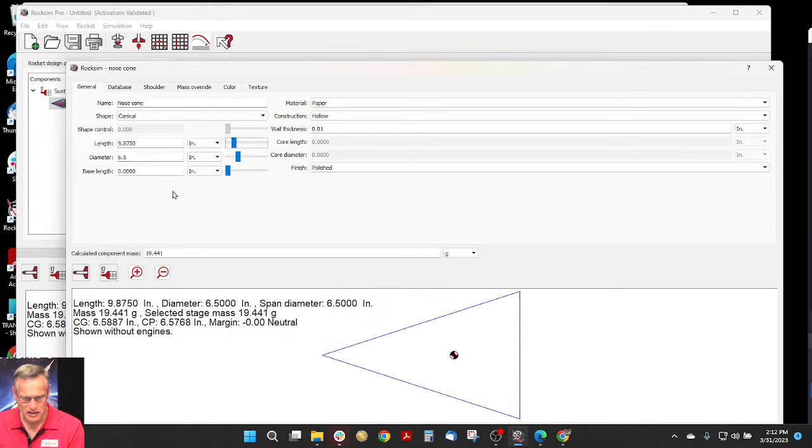The length, okay, so now we're drawing our cone rocket right here. So there's our cone. And we'll click, where's my OK button? There it is down here. All right, so we have our nose cone. Now we have to put in a body tube. So we're going to click inside tube. And this time I'm going to select from the database. I'll select an 18 millimeter by 2.75 inch long tube. On this screen you can't see it, let me make it a little bit bigger.

Okay, so there's our body tube, but let's move it back to here. Well, let's recess it a little bit. One of the things with rockets is we got to make sure that the center of gravity is in front of the center of pressure. And right now we're behind, so it says unstable. We'll call this the engine mount tube. And we'll click OK. Oops, I forgot to do one thing. On that screen, there's a little box right over here that says this is a motor mount. You got to check that. And it's going to be 18 millimeters. Click OK.

Actually, I want to do one more thing. I want to load an engine at the same time so that we can get a gauge of how much nose weight we're going to need to add. Estes C6-3, engine overhang of 0.5 inches, so it's going to hang out the back just a little bit. So there's our rocket engine, the brown part. Our center of gravity is back here, so we need to add some nose weight to move that center of gravity forward.

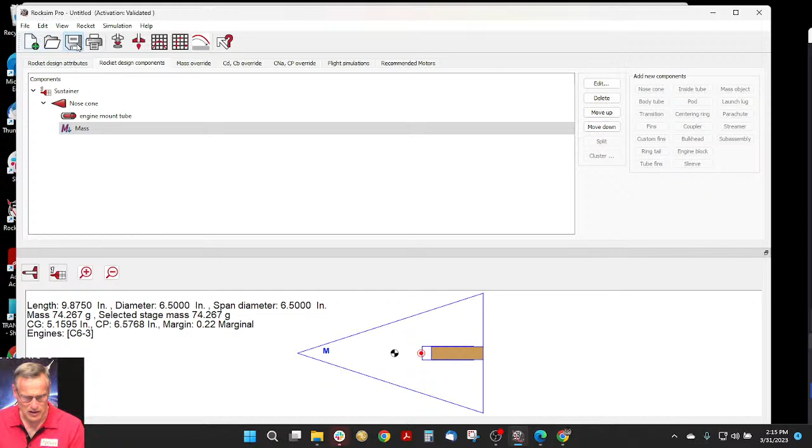And let's save this design. I'm just going to throw it on the desktop if I can find my desktop. There it is. And we'll just call it Cone Rocket. Hit save. All right, so let's launch it. We've already got the engine loaded. Flight events, nothing's going to happen. We don't have a parachute in it.

Starting state, 60-inch launch rod. Let's make that 36. That's your standard size. Degrees from vertical, 13. So that's kind of arced over. This is like your launch angle control. And here is our azimuth angle. This is like a compass. North is at the top, east is to the right, south, and west is over here. So we're kind of launching to the northwest.

Our launch conditions, I'm not sure where this launch site is, but we'll find out pretty quick here. But it's 422 feet above sea level, and we have a temperature of 59 degrees.

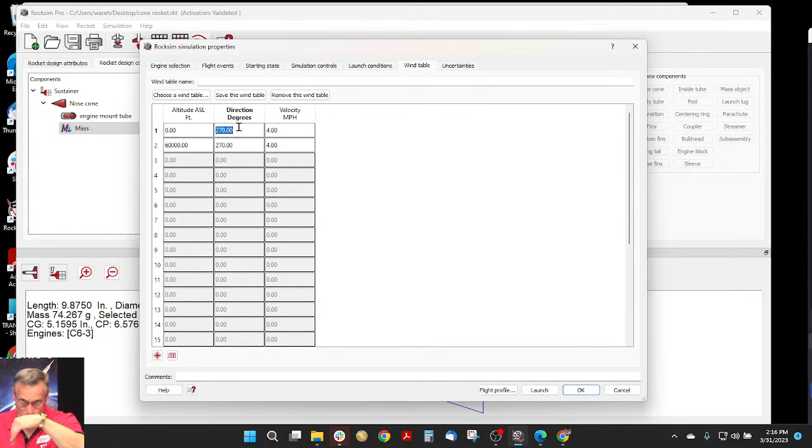Under wind, we have a 4-mile-an-hour wind coming out of the west. So this is the compass direction. So west is 270 degrees. So 0 degrees is north, 90 would be east, 180 is wind coming from the south, and 270 is wind coming from the west. And we'll go ahead and launch this.

And since we're in, ooh, this is doing 200 simulations. I didn't turn that off. Cancel that, or we'd have to sit here for 200 times. But it still ran the simulation, and we'll have the rocket sitting here on our launch pad as soon as it is done loading the maps. So we're in this field. It's a nice little field. There's no crops in the field right now.

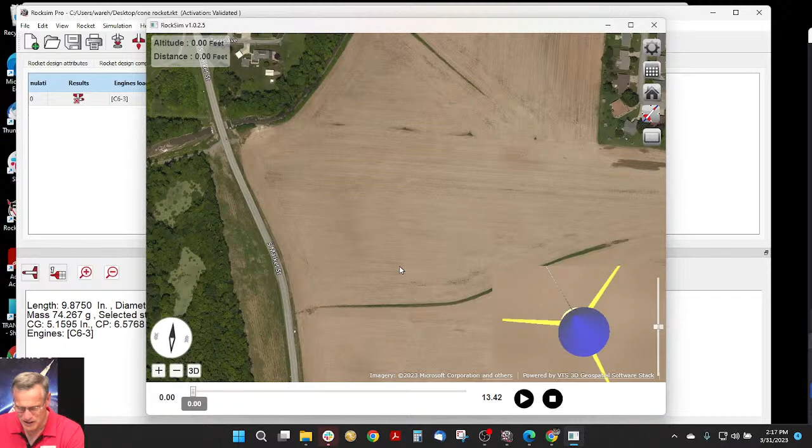And yeah, so when we launch it, where's the rocket? I can see the rocket down here, but I'm not seeing it in the screen. Let me pause it here and let's get a different angle and zoom in. All right, so there's the rocket. The rocket took off. Oops, no, it's not tracking the rocket anymore. There's our rocket, and it's arced over, and it's going to generally come screaming down into the ground. So it's going to point to the ground, nose first.

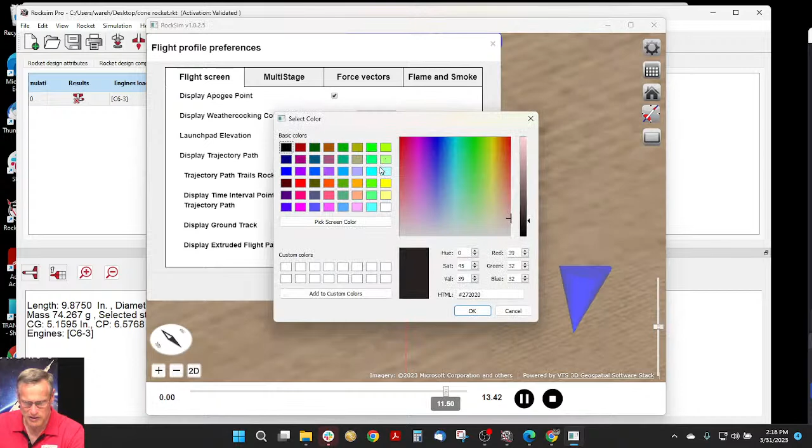Let's turn on some things to make it easier to see. So let's turn on the trajectory path. Let's make that green so we can see it. Ground track I want to see. I don't need to see the time intervals. And the extruded path, and let's turn on some smoke. Yeah, we got the smoke on. Okay, so let's zoom out just a little bit so we can see this thing.

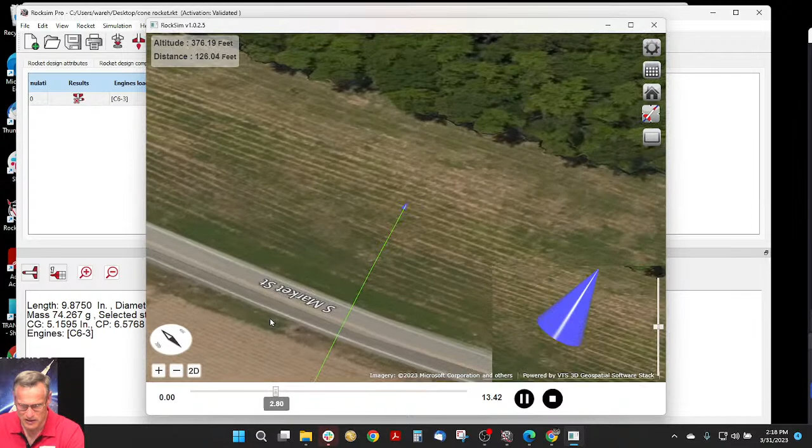It's gone about 460 feet into the air, and it's coming screaming down. The wind is catching it. Now with the motor burned out, it's pretty light. So there's our path. You can see that's at apogee now, and it's coming down, and it seems to be coming down just as fast as it went up. And you can see by the trajectory that, and I'll pause it here when it gets to the point I want. It's picking up speed.

You can see it seems like it's going faster, but then it starts arcing back into the ground. It is stable. And so it's got this curve, and it lands onto the ground. It's coming in nearly straight up and down, which is kind of cool. It didn't go very far. It landed 96 feet away from our starting point here in the middle of this field. So I know that's not what you expected of a finless rocket, but it's stable.

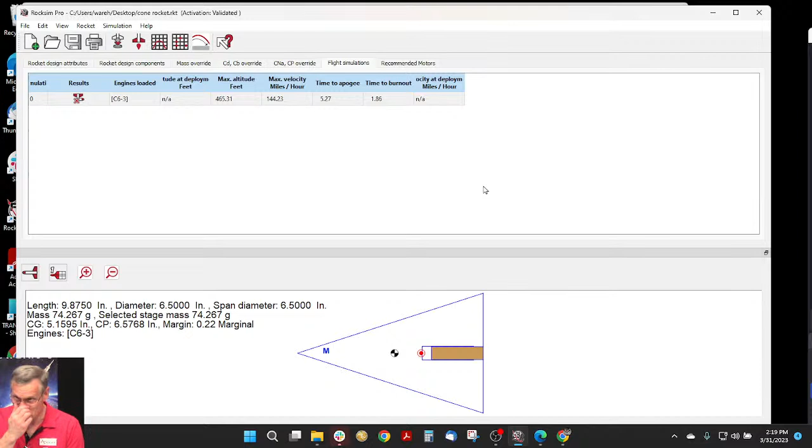Yeah, the fins provide a lot of stability. The other thing that provides stability is a spinning rocket. And since we're in RockSim Pro, we can do a spinning rocket. So let me start this design over again. So I'm going to create a new design, and it's going to ask me if I want to save the old one, and I'm going to just say, sure, I already saved it once.

Okay, so then to start a design, we start by going along here. So under the Rocket Design Attributes, oh boy, what's going on here? There we go. You got to find the right spot. I've heard people having problems clicking on this button, and that is weird. Now I'm seeing it for myself. If you get right on the second T, it seems to work. Yeah, that is weird. I'll have to inform the programmers of that.

Okay, so this is going to be finless rocket. We're going to use the RockSim stability equations. This past week, somebody asked what was the difference between RockSim and Barrowman. RockSim is Barrowman, but the original Barrowman equations had a lot of assumptions in it, because at the time that they were generated, it was like 1965, so this was getting close to 60 years ago. They didn't have computers that could do all the calculations, so he made some simplifying assumptions.

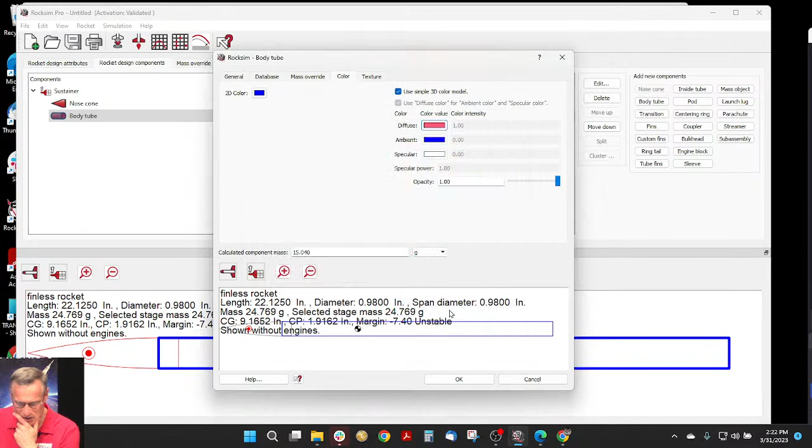Okay, so there's our nose cone. Click OK. Let's add a body tube. So that was a 24 millimeter nose cone, so we need a 24 millimeter tube. And there's a tube. And let's change the color of this one. Make it pink. And lighter blue. Okay. All right, let's add a motor mount tube.

Let's see, do we like the length of this? It's pretty long. Let's see if that makes any difference. So let's add an inside tube for our motor mount. So it's going to be an 18 millimeter motor mount. Let's make the length 2.75. And change the location to the base of the owning part, and then just move it all the way back to there. So there's our motor mount. It is a motor mount.

Let's load an engine like we did before. And I always choose like a C6 or a D something, because I always want the heaviest motor in there as possible. Let's choose a 6-second delay. Okay, so this rocket is very unstable. Let's add a parachute. Let's change the name of this tube, so engine mount tube.

Okay, so I'm going to add a parachute into here, and it doesn't have to be a big one. So we'll just make it a 12-inch, and color. Let's make it yellow, and that color. And right now it's right here in the nose, and I'll move it back. So click on the General tab, and here's our location right here. So I'm just going to take this slider and just slide it back. So it's more stable, but it's still unstable.

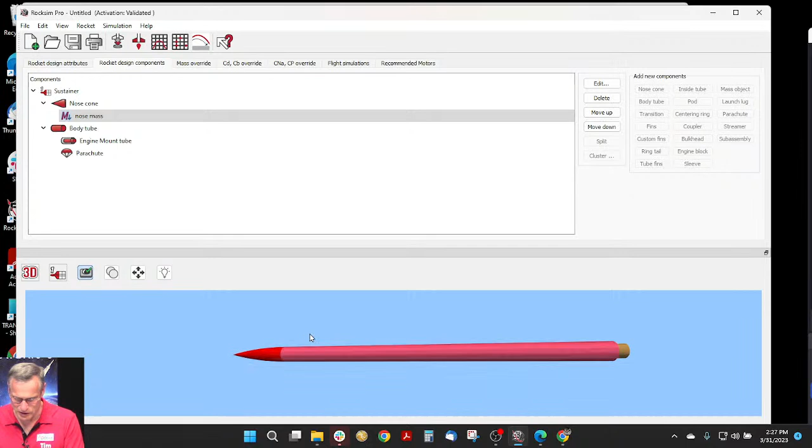Okay, so we added this nose mass. I'll call it a nose mass. Click OK. So here's our nose mass up there. If we look at it in 3D, yeah, so there's our rocket so far. Let's save this rocket, and we'll call it Finless Rocket 1, because we might have more than one version. Okay, so let's just launch it to see what's going to happen.

So let's see. So the flight. So we have a C18 as our motor. So that's a Quest motor. It's a high thrust motor, and I kind of chose high thrust because long burn motors and finless rockets... We're designing a bullet, and for a bullet to be stable, it's got to go fast. So that's why I chose the C18. So we do have a parachute, and we'll eject it at the maximum ejection delay, and our delay was, what the heck is going on?

Interesting. Why can't I click into this engine selection? Okay. My programmer's got this. Sometimes, when they change Windows, it will break things in RockSim, and then we've got to fix RockSim. I didn't want to have to do another fix before we release version 11. I'll be able to tell what's our engine delay here in just a second.

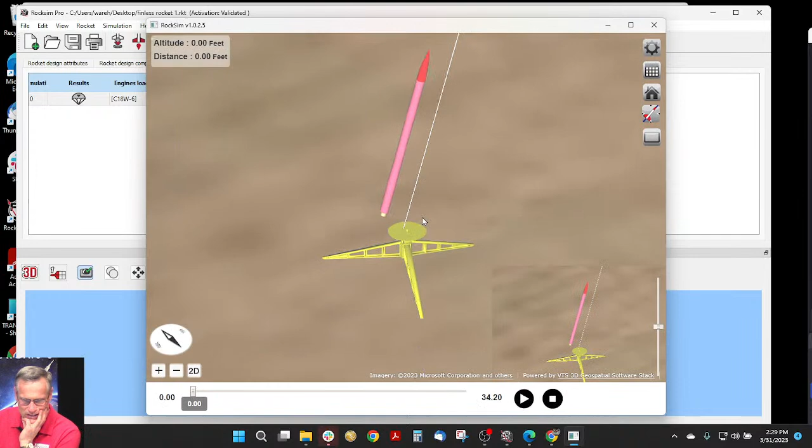So starting state still launching straight at 13 degrees. And let's just launch it again. So let's see what this thing's going to do. I forgot to turn off that. I'll do that the next time. Okay, so here's our rocket sitting on the pad. And I am pretty sure that this one's going to go unstable. So here's the rocket, and when we launch it, oh, look at that. It went mostly stable until that point when it flipped on its rear. Interesting.

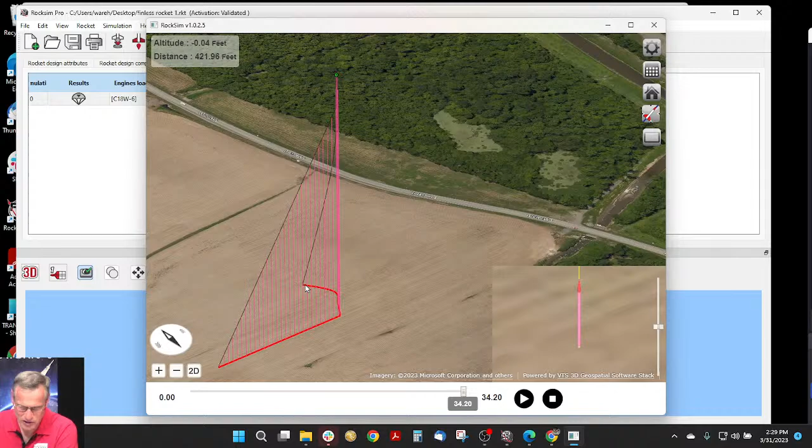Let's turn on this stuff again. And I don't need to see the interval points. Why didn't that remember? Okay, so let me go to the end. Oh, look at this trajectory. So this is the landing point. Here's the launch point. And if you look at the ground track, remember, we launched this kind of to the northwest. So north is now vertical. We launched it right here, and it went this way, but then it started going that way.

And that dot right there is our apogee point. And so it was still going up, and it changed trajectory while it was still going up. That was probably because around here is where the rear end of the rocket started going unstable. So let's see that again.

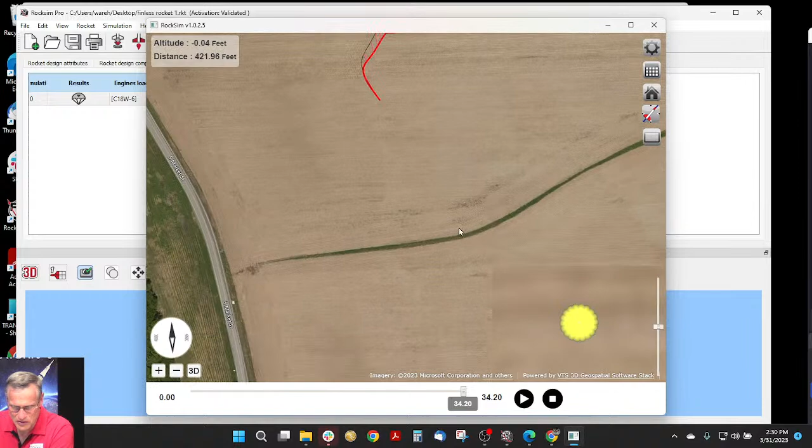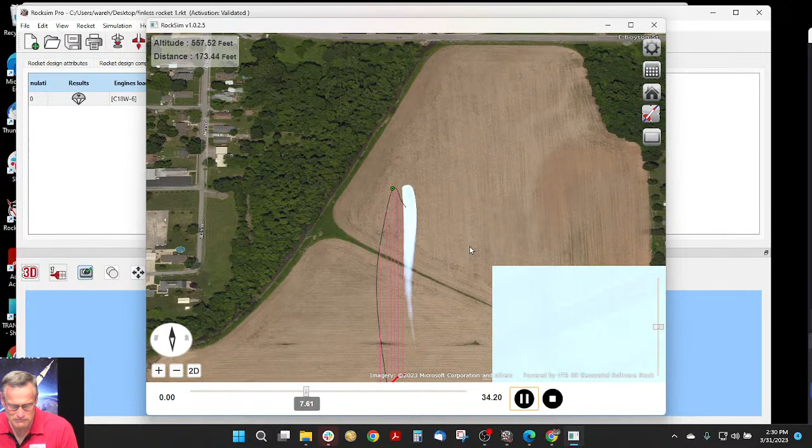Okay, see if we can launch it. So it's taken off, and right there, you know, the back end swinging around to the front, but it still went pretty high, 600 feet maybe. And now it's coming down. Okay. So that was pretty fun.

Let's see what we can do to this to see if we can get it to perform a little bit better. So one of the things you can do in RockSim Pro, and this RockSim doesn't have this feature, but RockSim Pro does, is you can spin the rocket like a bullet. And that is on, oh, so here it is. It was a 6-second delay.

So under starting state, I can give it a starting roll rate. So this is spinning it. And so right now we're in degrees per second. So if it was 360 degrees per second, it's 1 revolution per second. And that's not very fast.

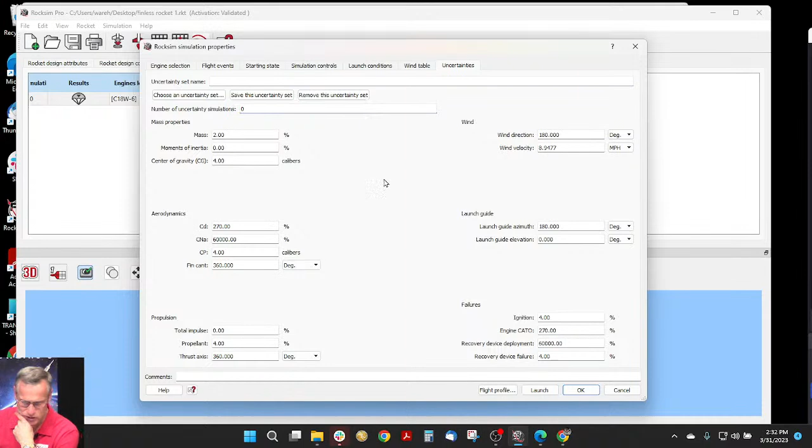So 2 revolutions would be 720. 1440 would be 4 revolutions per second, or degrees per second. So four revolutions per second is what I'm going to do here. And let me turn off the uncertainties here. So it's 0 uncertainties. So when we do a flight profile this time and we launch it, look at that.

By spinning it, I can already tell we went from 585 feet. We're going this time to 1178 feet on a C motor. And let's zoom out a little bit. So there's the rocket on the pad, sitting in the middle of the brown field, and it's going pretty straight. You can't tell it's spinning though. But that was not a bad flight, you know, and that's just by spinning it.

So how do you spin a rocket that doesn't have fins? Well, you would probably have to put it on a turntable, like an old record player, and spin it and launch it. You'd probably have to have your launch controller, like a wireless launch controller, sitting right under your launch pad, so you could sit it on your turntable. That might work. Never tried it. If somebody does, try it. Send me pictures, or better yet, a video to see if that would do it.

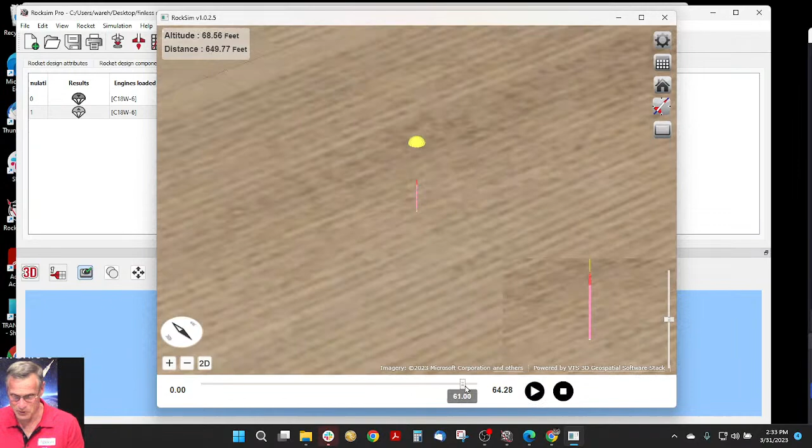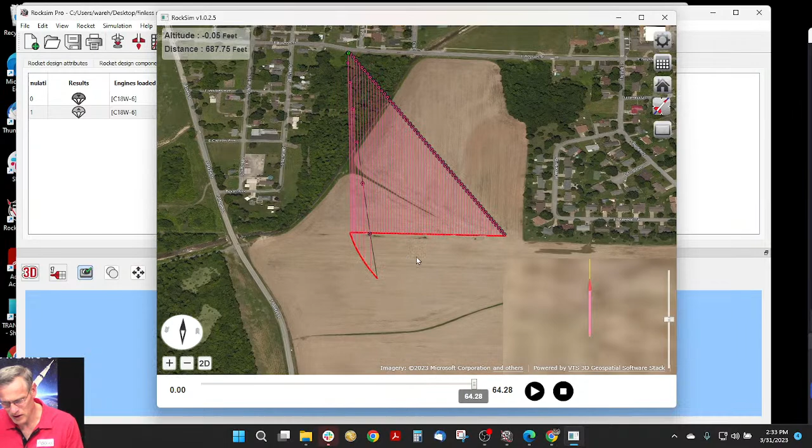So this should be remembering my stuff here. All right, so the trajectory looks a bit different this time. It's kind of curving this way, and that is interesting. It kind of looks like a number 7. All right, so that was cool. So I would say that's a successful finless rocket, but you got to spin it.

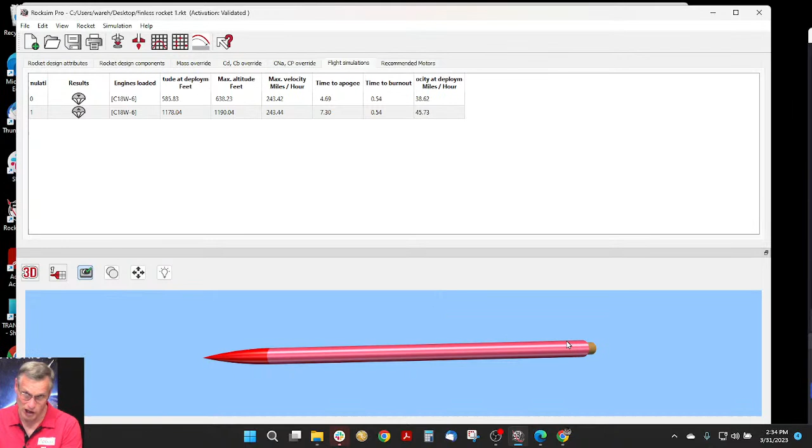What else could we do? And I was kind of alluding to this, is we can add things on the back of the rocket that aren't fins. And like we did with the nose cone, the conical shaped rocket, we could add cone shaped fins. And we can't call them fins because we're doing a finless rocket. But let's add nose cones to the side of the rocket.

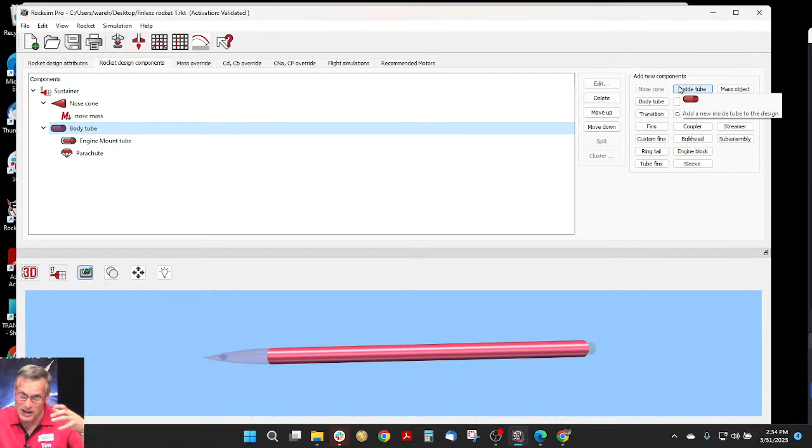So under the design components, let's click on the body tube, and we're going to add a pod. So to put anything on the outside of the rocket, we have to use this button here called pod. And right now, I'm going to make this screen bigger. So the location of the pod, the front point of the pod, is right here, but we'll move that back later. We're going to put it way back here. We'll come back to this.

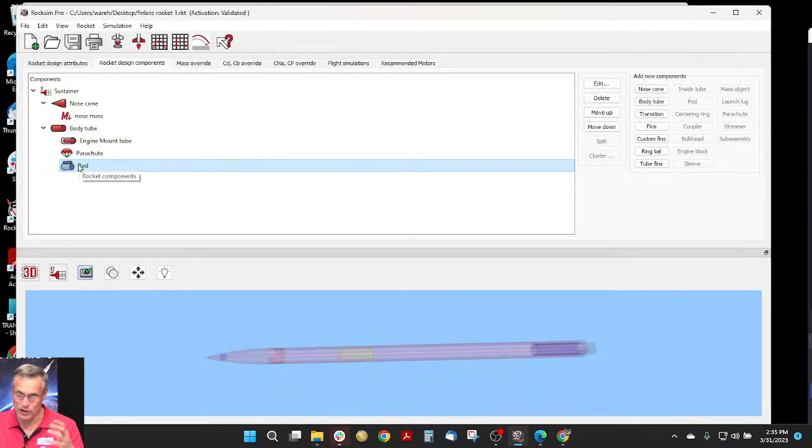Can this pod be ejected during simulations? Let's say no. And let's click OK. So a pod is like a placeholder. We're going to add parts to it. So like sustainer is a placeholder, and we added these parts to it. So now we're going to add parts to this pod. And the first thing we're going to add is a nose cone. And let's go with a 24 millimeter nose cone if we can find one.

And we can't do it on this screen. We've got to do it from the pod screen. So click OK there. So there's the nose cone. I'm going to go back to the pod, double click on it to edit, and from here we can move the location. So I'm trying to line the back of the nose cone up to the back of the rocket, which is right there.

So let's try 8.85. Ooh, that's really close. 8.9, too far. 8.8, close enough. Okay, so click OK. So now it's still finless if you don't think of that nose cone as a fin. Let's see what happens when we launch it, if we just have one on there.

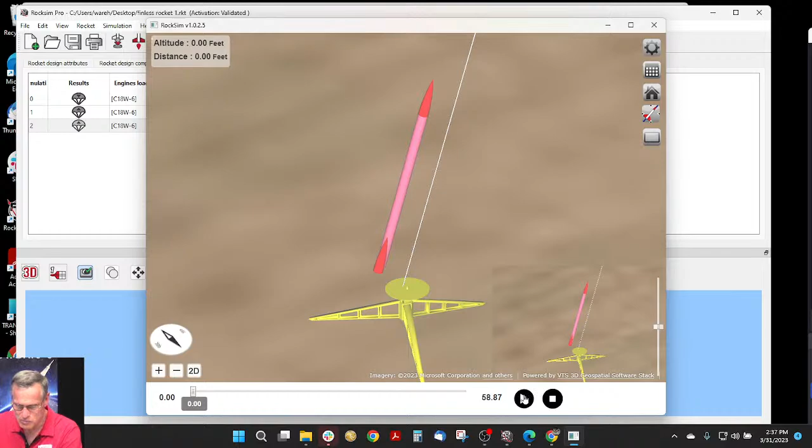So I'm going to go back here and just do the flight profile. Not going to change anything. Flight profile, let's see. Oh, one of the things that I didn't change is I still have a rotation rate here. So now we will see it spinning because that nose cone will spin around as that rocket takes off. See it? Interesting, right? It's still spinning.

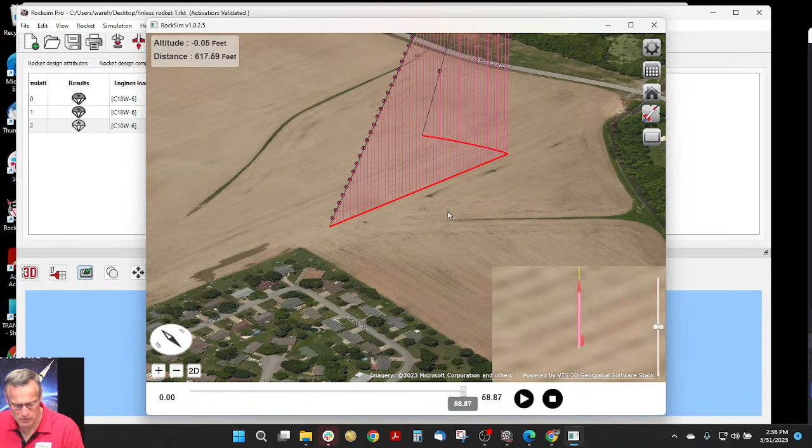Let's get it all the way to the end, and I want to see the trajectory. Click OK. And I want to zoom out a little bit. Pretty much the same kind of trajectory. It still looks like a number 7. And let's close that and let's see here. With the extra drag of that nose cone, it didn't go quite as high.

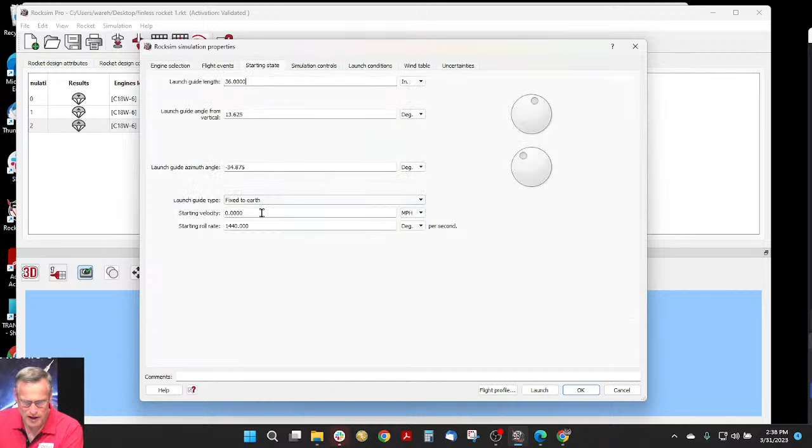But let's do it again. This time let's turn off that initial starting roll rate. So I'm going to make that 0 and then do the flight profile again and see what happens. Okay, so we did get different results. Now it is going higher again. And look at this. It actually goes higher than the rocket that was spinning. And you might want to examine why that is. So we're doing all kinds of experiments here. Now we're learning about aerodynamics that we didn't even think we would be learning about.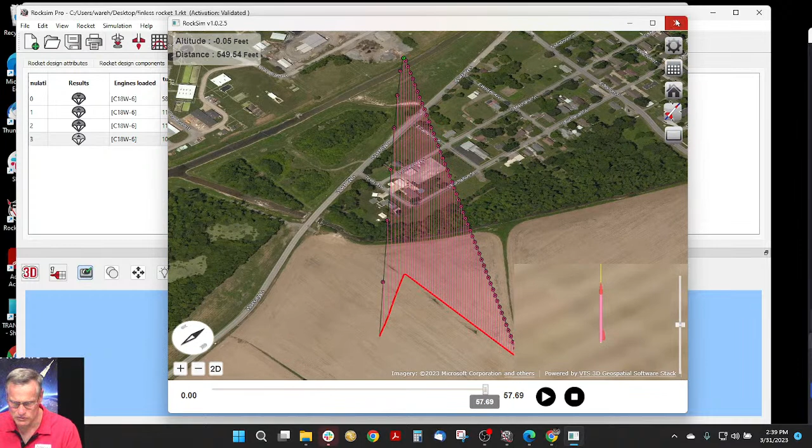That's interesting, huh? Okay. Oh, so the question that Terry had, does RockSim account for the propellant mass that's burning off? And the answer is you can see that here in the charts. So we're going to create a chart and display the mass. So first I want to display, here's mass, and I also want to display total thrust. And let's clear this out. Okay, so we're going to have a chart, and let's change the graph ending point to apogee, because it will reach apogee pretty quick, and then plot that graph.

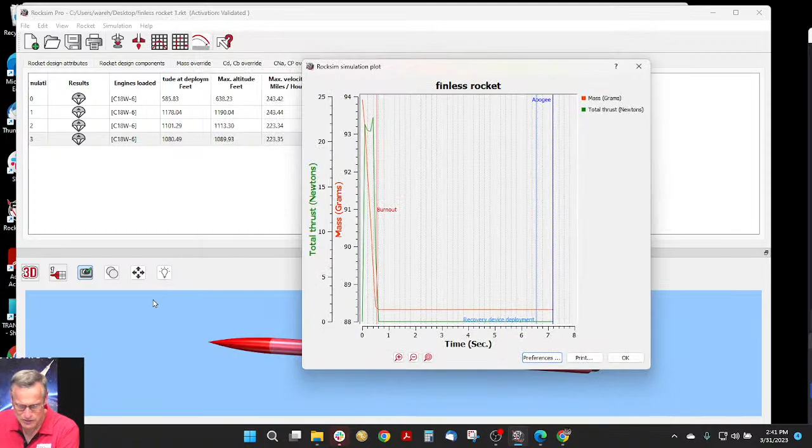All right, can I make this larger? Okay, so mass right here is the orange line. So it starts out up here at a mass of almost 94 grams, and then the mass drops off as something is happening. And what is happening? Well, we look at the thrust, from here to here, and this line right here shows when it burns out. And oops, I zoomed in too much. The mass goes down, and it continues to go down right up until this point here, which is burnout.

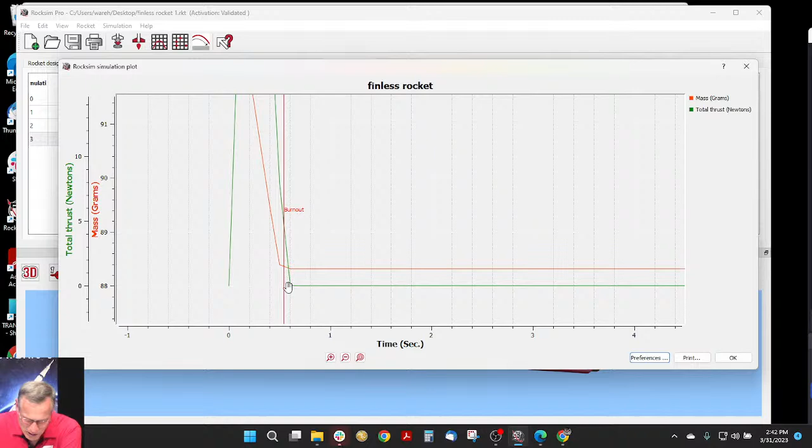Huh. There's like a little dog leg here that I wasn't expecting. Why would that be? So here's burnout. This burnout line should be right here where my thumb is on my screen, because that's where the thrust goes back down to 0. So my burnout line is a little bit too early for some reason. But yeah, so it does account for the propellant being burned off during the flight. That's a really good question.

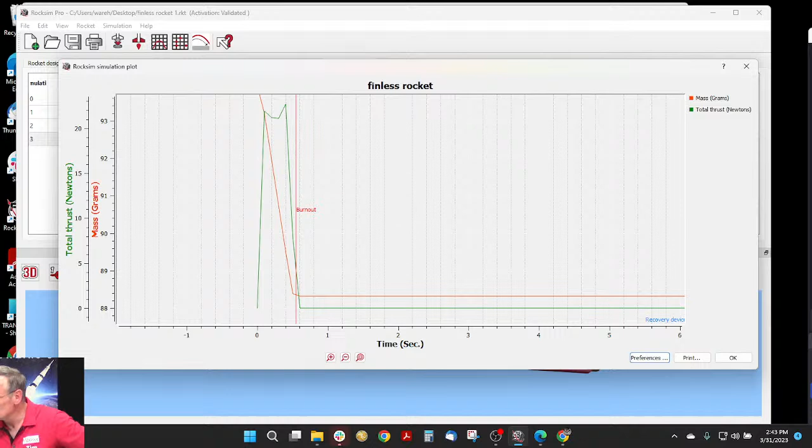Terry says, try moving the motor forward in the tube. So I think he's thinking, let's make like a bottle rocket.

You could theoretically do that in RockSim, but it would still be unstable because the stick doesn't contribute any forces to the flight in RockSim. In real life, the stick is going to produce drag.

So what's a bottle rocket look like? So we'll design a bottle rocket. So let's save this design, start a new one. Okay, so this time we're gonna start with, call it a bottle rocket. And we'll go here, we'll create a body tube. So instead of starting with a nose cone, we'll start with a body tube. And this is where our rocket engine is going to go into.

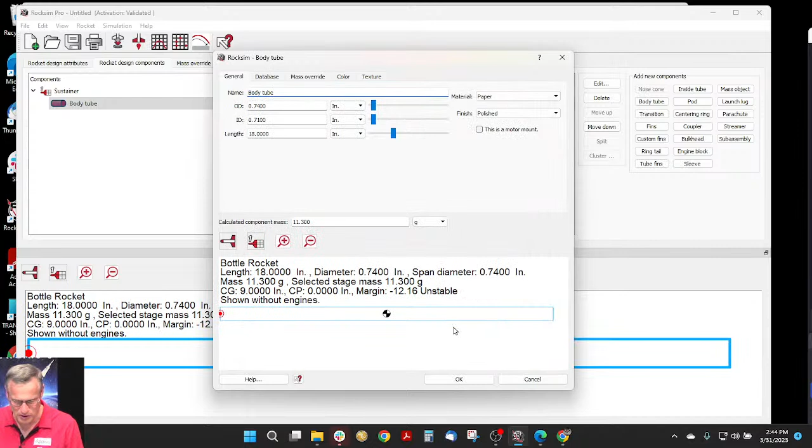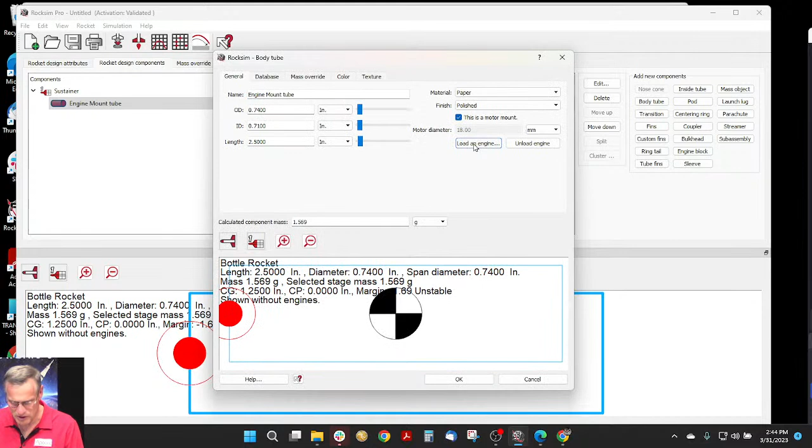So it's an 18 millimeter, and we're going to make it short, so let's make it 2.5 inches. And click OK. Let's call it the engine mount tube. Click OK. This is a motor mount tube. Let's load an engine. C6-3. So we loaded the engine in there. Click OK. If you look at it in 3D, what does it look like? It just looks like a tube with a rocket motor sticking out the back.

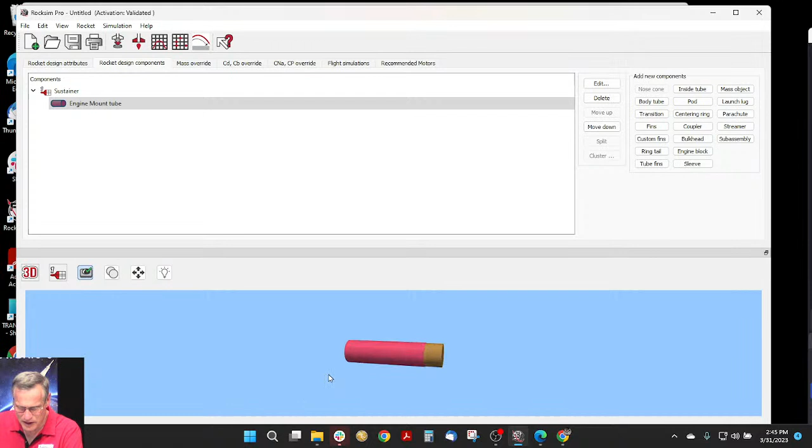And now we need to add the stick to make it a bottle rocket. So again, anything on the outside of the rocket that's not a fin has to be put on with a pod. So we'll come over here to pod, and we'll just leave all that alone. And it put the pod right at the front of the tube. And we're going to add a tube to that. There's not a stick in RockSim, but we can create a stick by adjusting some parameters.

So the outside diameter, let's make it 1/16 of an inch, so that's 0.0625 inches. The inside diameter is 0, and that will make it a solid cylinder. And let's make the length 18 inches. Oops, not 28, 18. Okay, so we'll say OK to that. Okay, so now we have our bottle rocket. Looks just like a bottle rocket I remember flying as a kid. So let's save this, and we'll call it a bottle rocket. And hit save. Let's look at it in 2D.

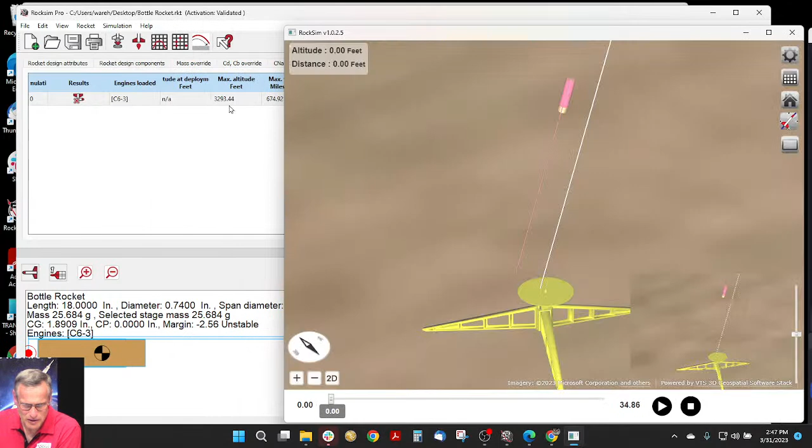And it says it's unstable. Bottle rockets didn't go very straight to begin with, but let's see what happens when we launch this. So C6-3, same as before, flight profile, let's see what it looks like. It crashed. Let's see, how high did it go? Wow, it went 3,000 feet. I would have never expected this to be stable. Come on, I want to grab this corner, and it doesn't want to let me grab the corner.

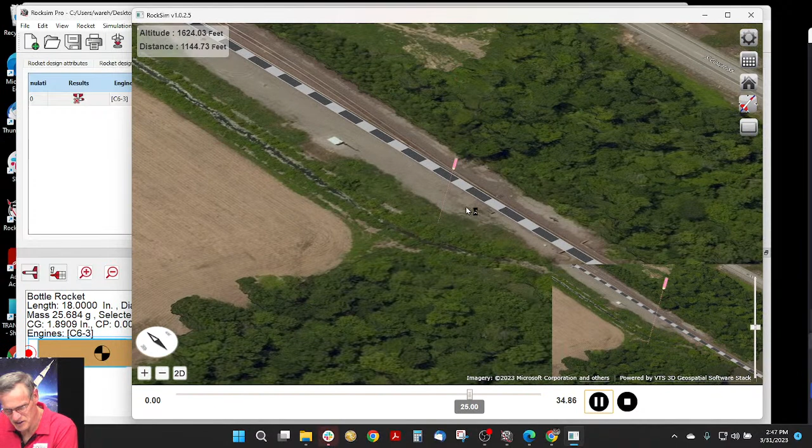Okay, so there's the bottle rocket on the pad. Can you see that? I hope you can see that. So we launch it. Look at that. The flame was down here at the bottom of the stick instead of at the bottom of the motor. But we're at over 3,000 feet. And then at that point, it's kind of tail sliding. It's not feeling any forces trying to spin it around. That's interesting, right? I think it's going to land and stick the stick right in the ground.

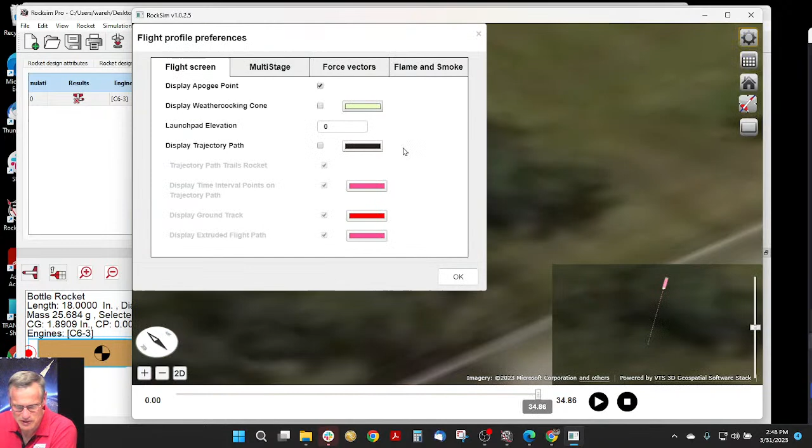The center of gravity is way up here, even with the casing of the motor, it's still heavy enough. It should flip over. But RockSim says that it's getting enough wind force from the side. Let me see the trajectory, see what that looks like. It did kind of wobble. Boy, it went a long way too. 1,157 feet. Wow, that was quite a launch.

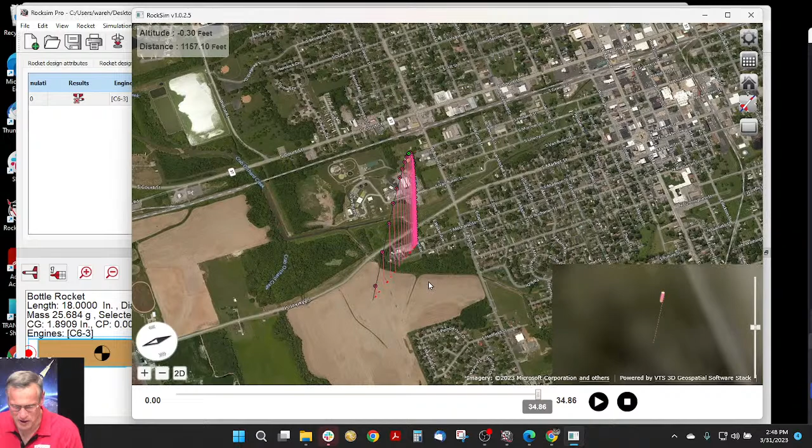You know, if you look at it from the top down, it's like a straight line. And it landed over there. That's interesting. I'm not sure that that's 100% accurate, and in fact, I'm sure it's not. Bottle rockets shouldn't go that high. All right, cool.

Okay, now we got people talking since we started talking fireworks. Mario Shuri, he's from Argentina: what is the limitation of RockSim 10 free? Oh, there's a lot of limitations, but as you can see from what we've done here today, we've done a lot of crazy things. So you've got to interpret the results, like with the bottle rocket that we just did. Is it really going to go 3,000 feet on a C motor? I kind of doubt it. So at that point, you've broken the limitations. You've exceeded the possibilities. So you have to kind of look at it.

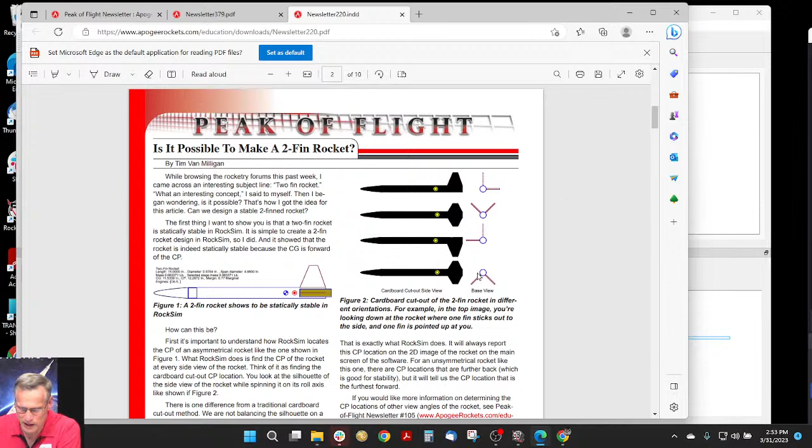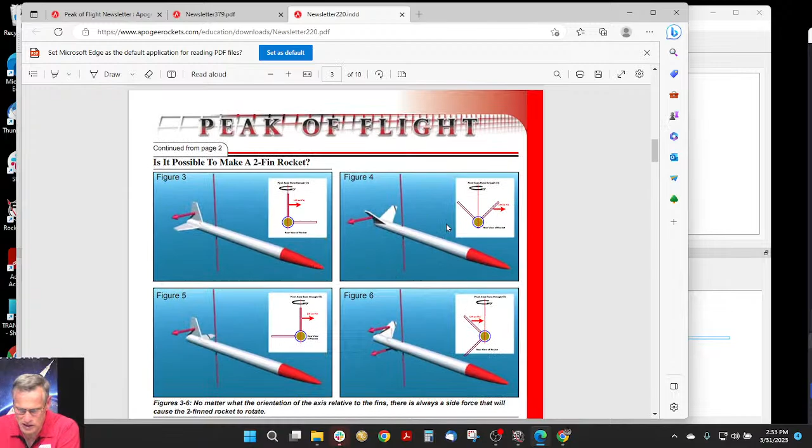And so what he said, his was at 53 degrees. So here is, like looking at the back of a rocket. You can see the configurations. And this one's at 90 degrees. And I've actually flown this. And it does work.

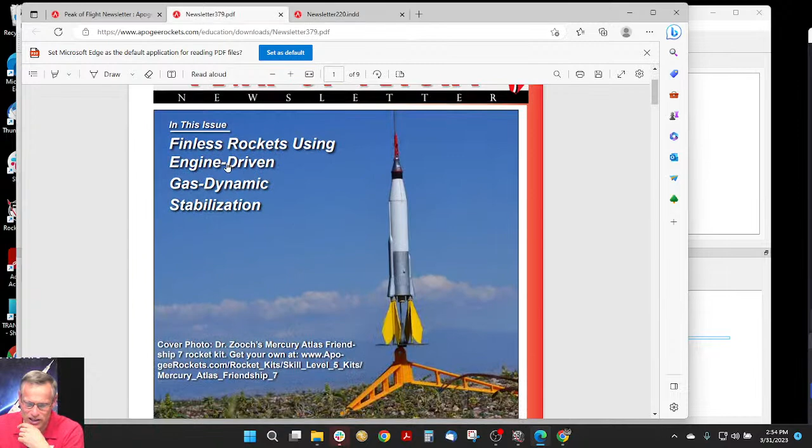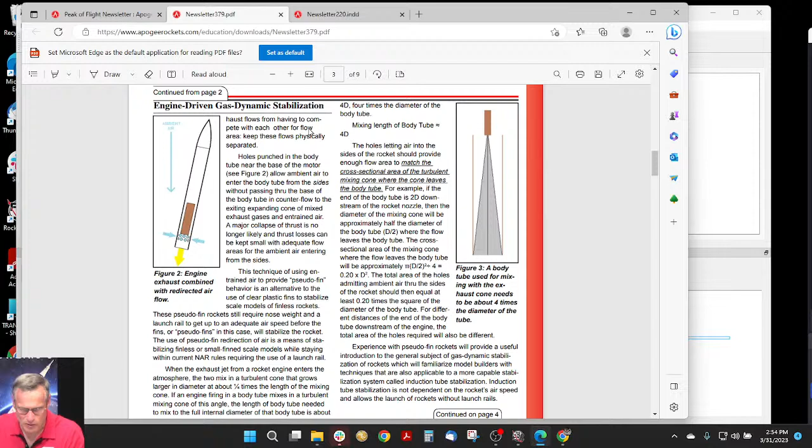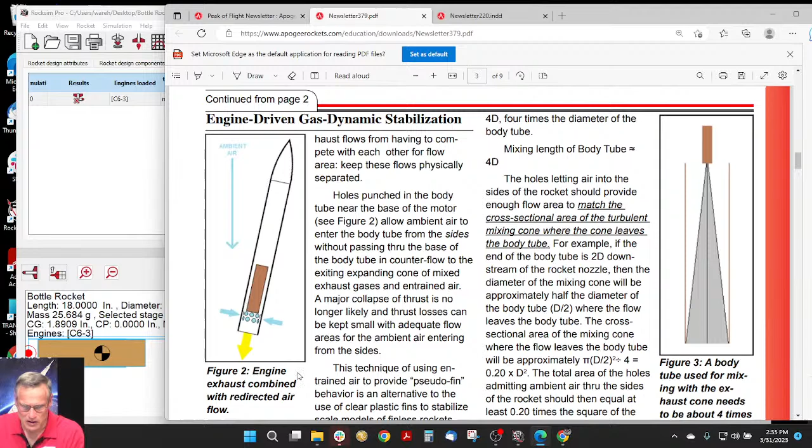This one is finless rockets using gas-driven or engine-driven gas dynamic stabilization. And so basically you have a rocket like this, kind of like what we designed, but you put holes down here. Let's see if I can make this bigger for you. How do I make this bigger? Where's the zoom in button? There it is. Let's move this way. So you put holes down here,

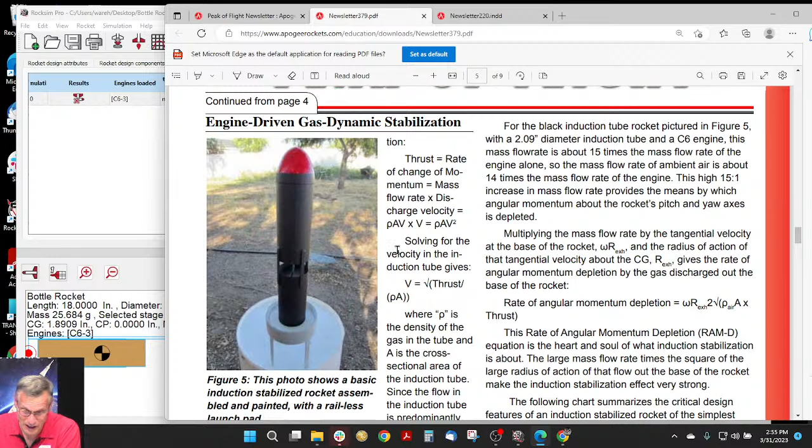and that does work. So here he put, well, actually he moved the motor further forward and extended it back. I've seen these fly. We have a guy in our club, Larry T. He flies these on occasion. They don't go very high because instead of the motor pushing the rocket up, you're using that energy to keep it stable.

So as the air is flowing over the rocket, it's being sucked in, kind of like a Venturi effect. With the engine putting thrust out, it's sucking air in. It's kind of like an airbrush. You know, you have air blowing out the nozzle, but it can suck liquid up through it.

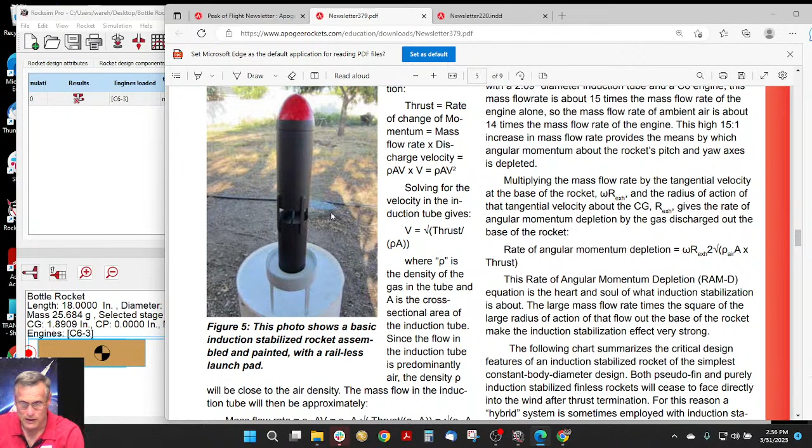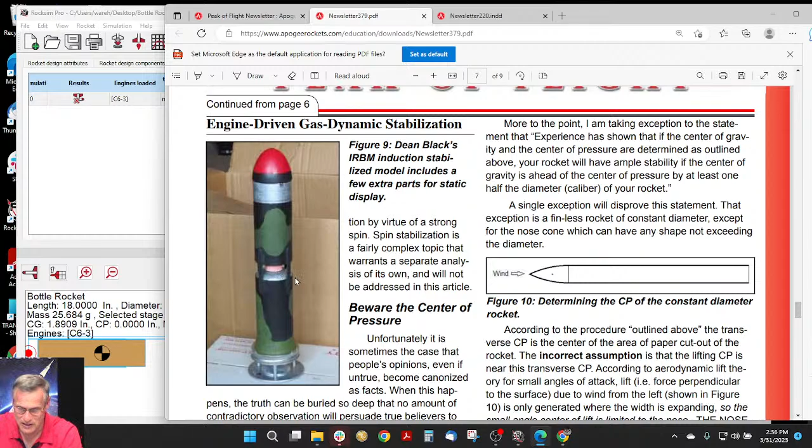And they do work. You can't really model them, so that's a limitation. You can't model this in RockSim because in RockSim the air is flowing around the rocket, not into the rocket. So it wouldn't know how to deal with it. So he made a Polaris rocket here. Yes, I have seen those fly.

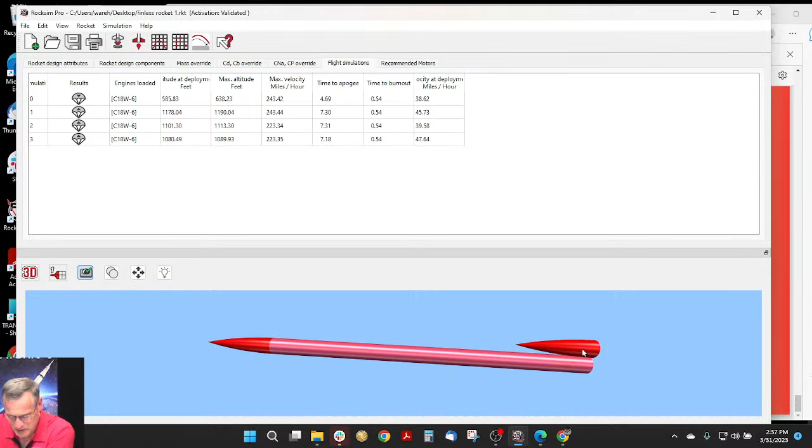So yes, Fat Bank, these will fly. Let's save that. Let's open up. Let's see. Where's my desktop? Let's go back to a desktop. Finless rocket number 1. Let's open that up. Let's take the nose cone off. Rocket design components. Let's delete the whole pod, and the nose cone will go away. Say yes, yes. So let's add a fin.

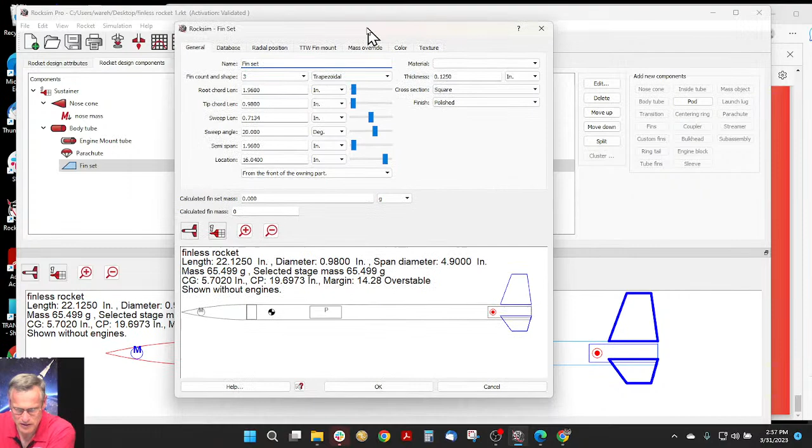So we'll add a fin. It looks in the database, but we'll just ignore that, and it just draws a generic fin. You can see that down there. Let's change it to 2 fins. The thing is, if you look at this from the back, the 2 fins are opposite each other, but we can fix that. I'm going to change the material to balsa and click OK.

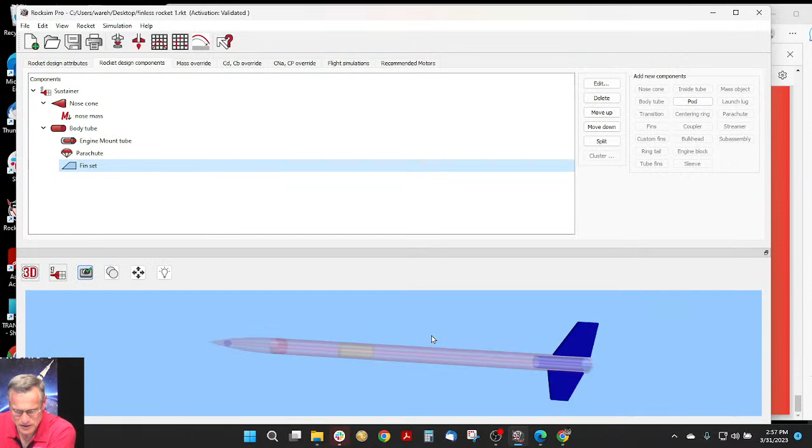So there's the 2 fin rocket like that, and if you look at it from the base view, it looks like that. It says it's unstable right now. So here's our center of pressure, and here's our center of gravity, and it's unstable because the fins are on opposite sides of each other. Let's launch it and just show you what it does.

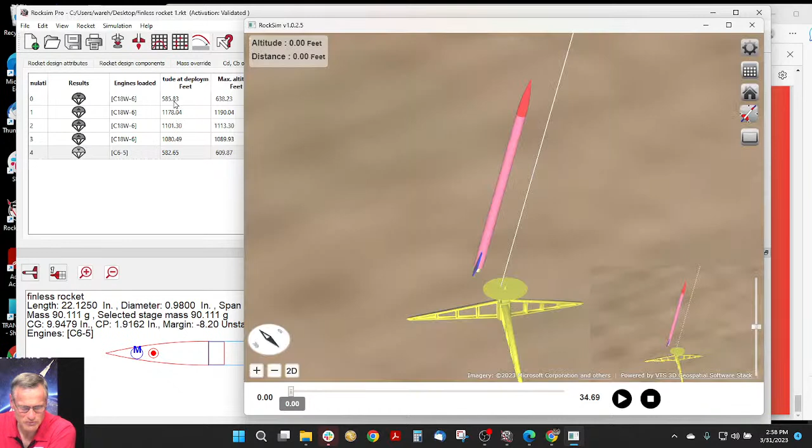So choose an engine. C6-5, come on, trying to grab 5. Click OK. And let's see, starting state, make sure we're not spinning, because that would be cheating. Okay, so at 582 feet, where before, on a C-18, we were 1,000 feet. So this is not going quite as high.

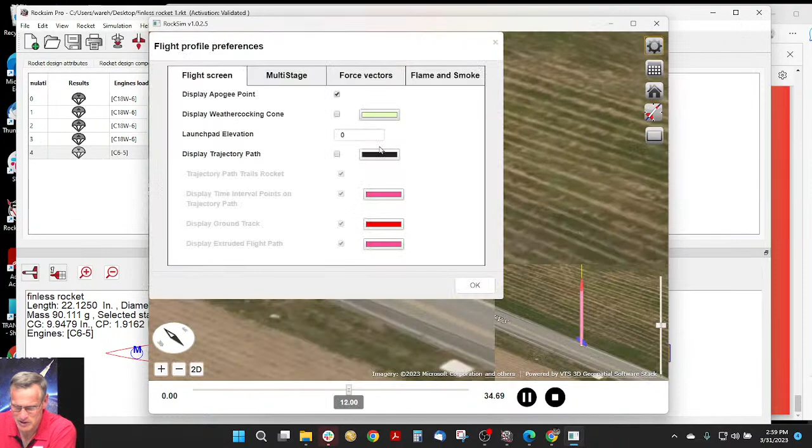You can see, whoa, there it goes. It went unstable. It stayed stable a little ways, but now it's in the smoke. But it went unstable. Let's see the trajectory path. Let's zoom out.

Okay, so there's the trajectory path. You can see the ground path. It's like a hook now. Yeah, I like that one. Let's close that. Now let's move the fins.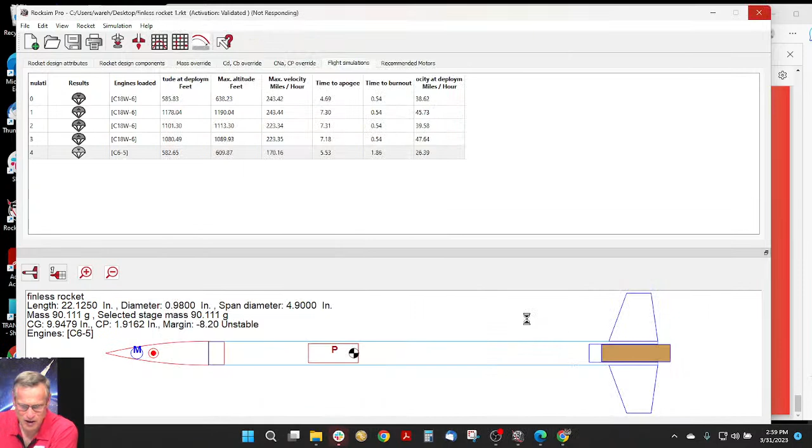So to move the fins, you go here to Design Components. You click on the fin set, and there's a button over here called Split. And we're going to split these fins into 2 fins. And we're going to say yes. So it says this operation cannot be undone. So I can't put them back as one set. Now they're going to be 2 individual fins. So I say yes. And so now they're still opposite each other, like that.

But I can go and edit one of them, and I can change its radial position. And, oh, that's cant angle. I don't want to change the cant angle. Radial angle. So he said he had 52 degrees. Wow, those are really tight.

So it's stable right up until even like 6 degrees. We're still stable. And then if we go a little bit further, then we're unstable. So at 10 degrees, we're unstable. But at 6 degrees, it says stable. That's in a perfect world. So let's set it at that angle. And let's launch it. See the flight profile.

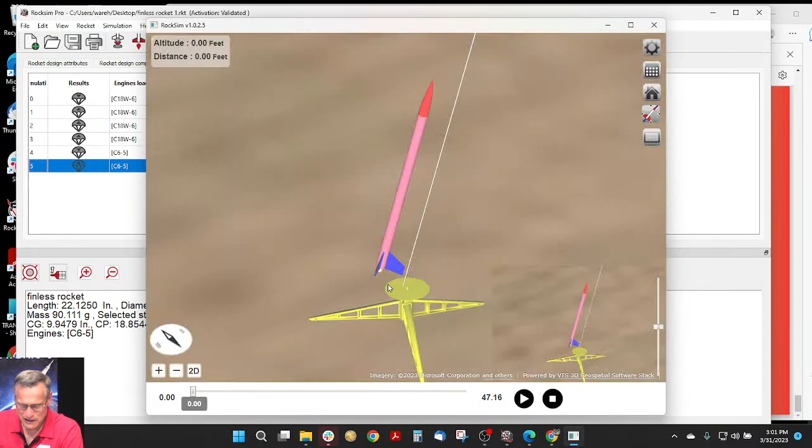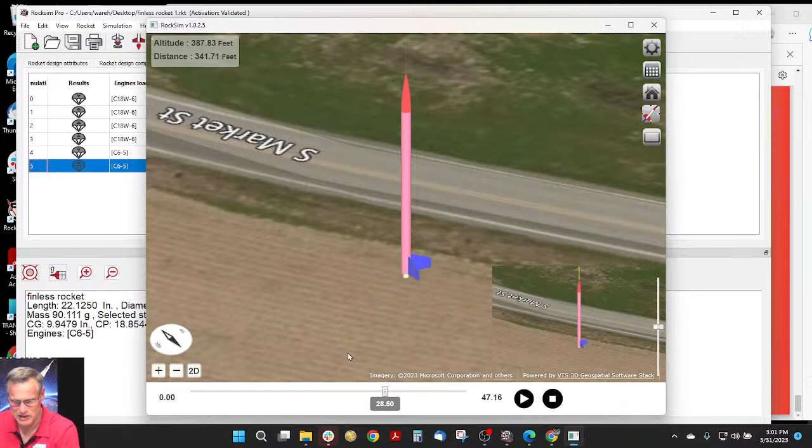Okay, so there's the rocket sitting on. Oops, I lost the rocket. But let's launch it. See what it does. Rocket takes off, and it's 400, 500, 600. So it went higher. Still not as high as if we would have had 3 or 4 fins. Because it's yawing a little bit, like turning sideways a little bit as it goes up. And you can see that like right here.

Let's show the trajectory. I always lose the rocket when I do that. Okay, let's zoom out. So if you look closely at this rocket, here's the trajectory, this black line. Let's change it to a different color so you can see it easier. Okay, so here's the trajectory line. So the path of the rocket is this way, but you can see that the body tube is not aligned with it. So it's kind of canted just a little bit, and what it does is it's creating drag.

This is why you want your rockets to fly straight along the path of the trajectory, because then they go higher and faster. So that's probably where we're losing our altitude, is because we're yawed just a little bit. There's pitch, roll, and yaw. This could be either yaw or pitch, depending on what you take as your axis. Okay.

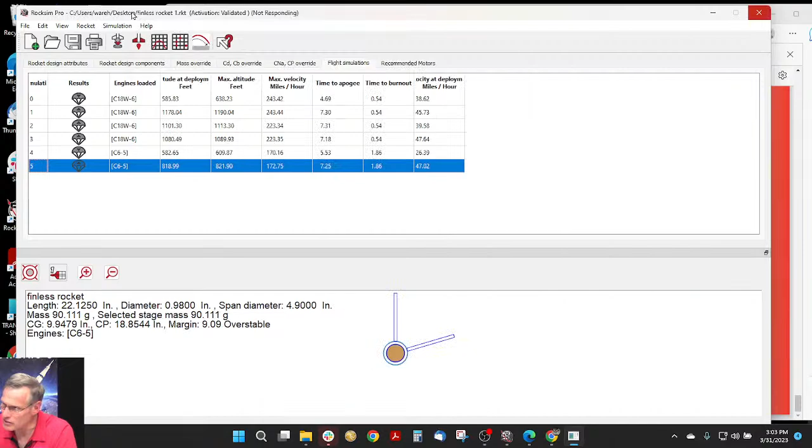Mario Chiri from Argentina says he flies his rockets from Concordia Entre Rios. Ooh, I don't know where that is. Now you're making me interested, Mario. Okay, let's go on Google Earth and find out where Mario is launching from.

Julia writes, little off subject, but if you want to put redundancy in dual deployment, how do you wire 2 altimeters to the charge? Or are there 2 separate charges for each of the altimeters? Julie, what I do is, let's see, I'll open up another browser here. Just give me a browser window. Let's go to

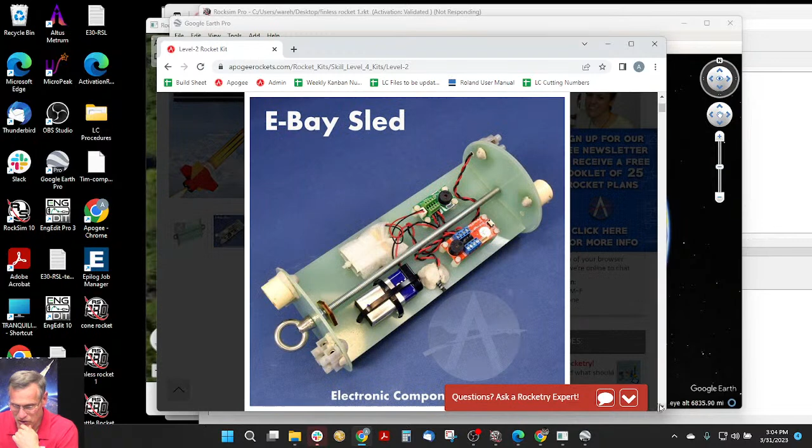ApogeeRockets.com, and one of our brand new rockets is the level 2, and this one is a dual deployment, and I did it with redundancy when I flew it. You don't have to, but I did. And so here is an image of my altimeter bay. I got one altimeter here, one altimeter here. Here's the battery for that altimeter. Here's the battery for this altimeter. There's a switch for this altimeter, and there's a switch for this altimeter, but it's on the underside of this board.

And if you look, actually you can't see it from this photo, but I had 2 terminal blocks on each side. It's just on the edge of this. This is an ejection charge well. That's where the ejection charge goes. So on the other side of that is one of these terminal blocks. And the terminal blocks allow you to run the wires from the altimeter to here, and then you run your igniter from the other end of the terminal block to here.

So what I do is you have 2 terminal blocks, 2 igniters, but only 1 ejection charge well. Because no matter which of those fires, it's going to burn all the black powder. Guaranteed. So you don't need 2 separate ejection charge wells. You can have 1 canister holding all your black powder and just have 2 igniters going inside of it. And if one of them works and one of them doesn't, it's still going to set everything off.

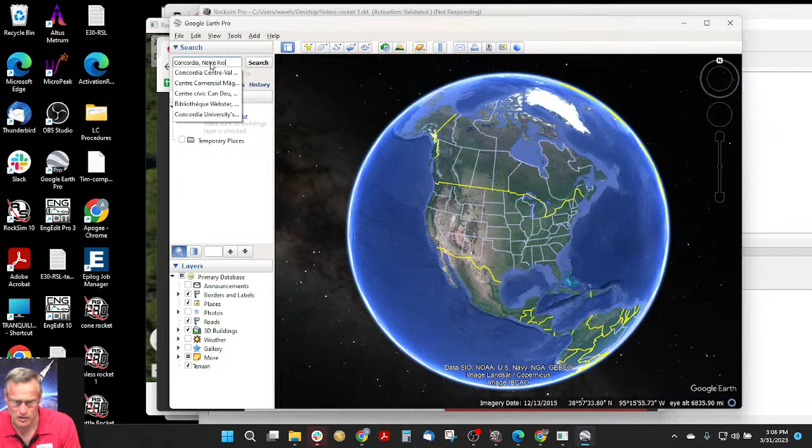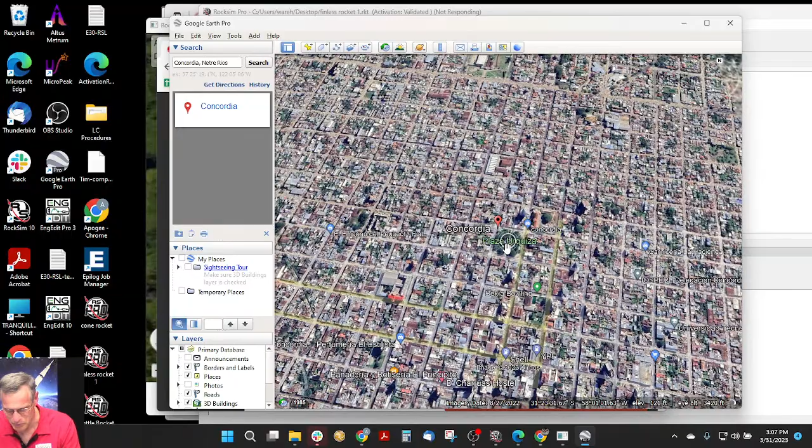Okay, so but we wanted to go here to, what was the name of that? Concordia. Concordia, Entre Rios. So we're going down here to South America. There's Concordia. Oh boy, that's a big city. There's a lot of people that live there. And they put the pin right near the plaza, right in the middle of the city. But where do you launch from in this area? I need a nice green field.

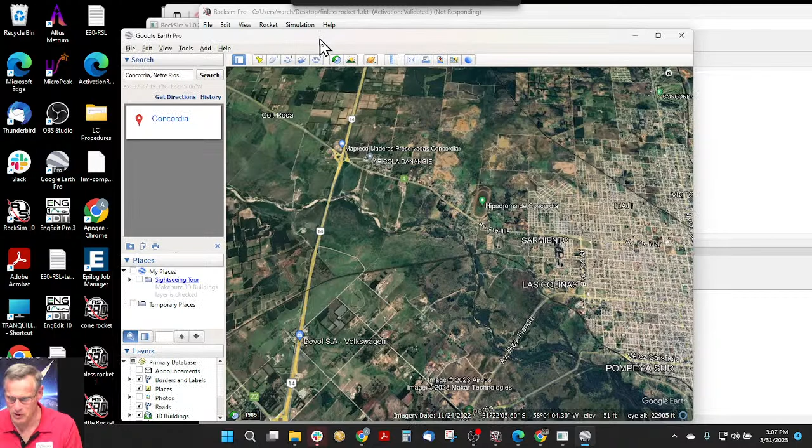And this is the Uruguay River. I'm sure you want to be far away from that. There looks to be some fields out here. This would be a nice field. So what you do is we need to put your launch site into the RockSim Pro. I mean, not, the launch visualizer. So where's the launch visualizer? Let's close that. I want to be here.

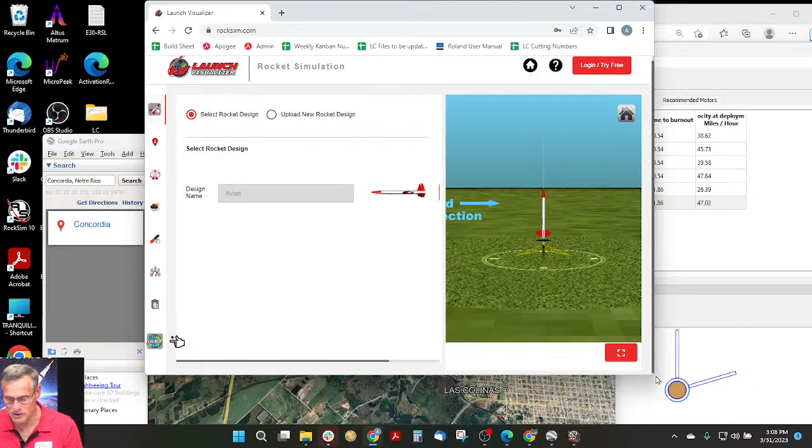The launch visualizer is rocksim.com. And I'll show you how to do it. And then you can send me your coordinates of your launch site. So we've been in RockSim Pro; RockSim Pro has the launch visualizer built in. But if you don't have RockSim Pro, you can do everything that we did here today online in the launch visualizer. So you come here to rocksim.com, you log in. I have an account, so I'm going to just sign in under my account. And then you come here to the launch site tab, click on that, and you find your location.

And Argentina. And let's see, it didn't find it. You'd think it would find Argentina. Come on, let's go 2D. I got to zoom out until I get to the world, and then Paraguay, Argentina. Oh man, I don't know what city that was. That was Concordia. Do we see Concordia, Argentina? Buenos Aires. I don't know where it is, but Cordoba.

But anyway, what you do is you find your launch site. Let's say we wanted to launch right there. So what you do is you double click, and it finds the latitude and longitude, and then you say save this site, and when you save it, you're going to save it into your own personal database. So I would do Argentina, and it has the latitude and the longitude and the altitude above sea level. So you guys are pretty high up. You're just like us here in Colorado. And then you hit submit. You fill out all that information. So now it's saved in your own personal database.

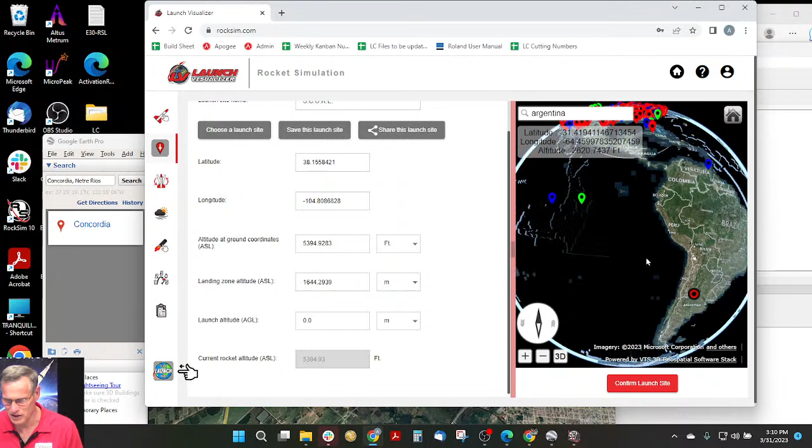There's some other launch sites here. I think they're on the other side of the world. I thought I had some in Australia. It's kind of like these are being weird. All right, so let's see what we got going on here.

Chris's Rocketry and More: would you be able to make the body tube bigger towards the bottom half of the rocket for drag? That's a good question. Chris, why don't you give it a try and report to us and see what happens? I don't think it's going to have... See, RockSim assumes that body tubes don't contribute any forces to the rocket. That's in the Barrowman equations. So by making the tube bigger, it's still not contributing any forces. So in RockSim, it shouldn't make any difference, but RockSim assumes that you're not getting extra drag. You'd have to make the base pretty big, kind of like a cone, to make it stable.

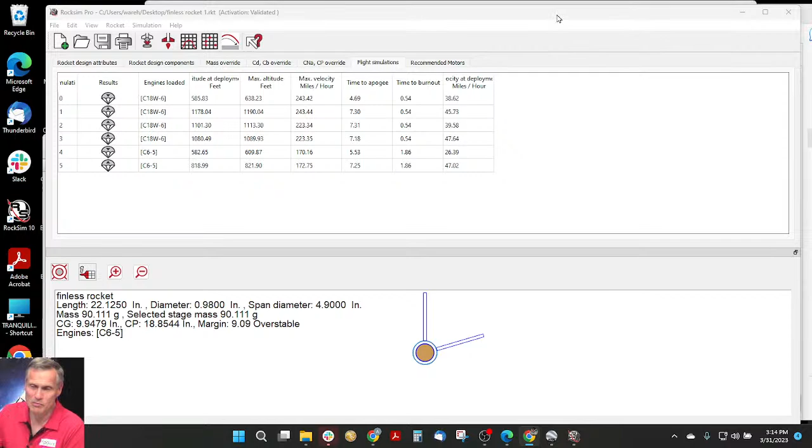There is no free demo of RockSim Pro, but like I said, you can use the launch visualizer to do everything RockSim Pro can do. So you can see the rocket, see all those trajectories that we saw. There's a free trial on the launch visualizer. Again, it's 30 days. And again, it limits it to apogee. Because again, we don't want people to use it to be targeting things that are on the ground.

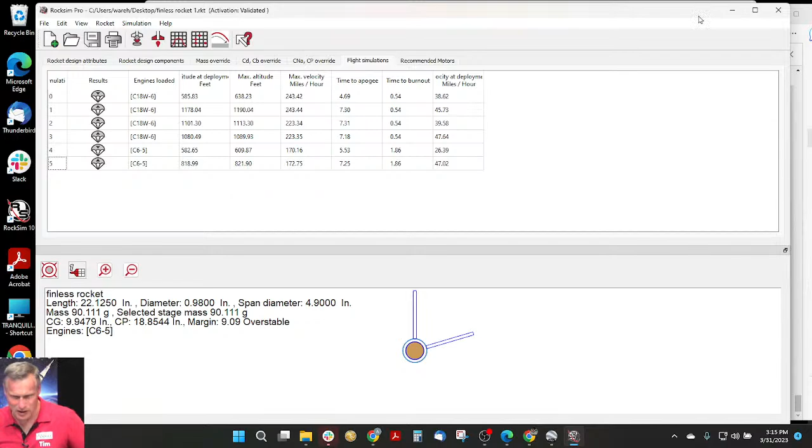Roberto T. Oh boy, we have gone well over an hour, so I might have to hold this question. How can I add a canopy to my Zephyr model simulation? And can I add an eBay, and add a double deployment to this model? And the answer is yes to both. So if you go back to our website, I'll show you how, I won't be able to do it here, but we do have a RockSim Live that talks about how to add a canopy.

So go to the home page and then just scroll down here to this image of the RockSim Live training, click on that, and that takes you to our archive. And then on our archive, do a Control F on your keyboard. On a Mac, it's Command F. You get this little search bar at the top, and then type in canopy. And episode number 6 shows how to add a cockpit canopy to a nose cone. And it's at 36 minutes into the video. So you just click on the video, go to YouTube, scrub through the timeline to 36 minutes, 24 seconds, and that's where we start that topic.

And then how to add an eBay to a rocket. And I think we talk about that too. So eBay. We talked about it 4 times. Moving an eBay off center line. Okay, so episode number 8, how to add a dual deployment eBay to an existing design like the Zephyr. Just like you were talking about. So go to episode number 8, and it's at 24 minutes into the episode where we talk about adding that eBay. If we would have had more time, I would have answered that question.